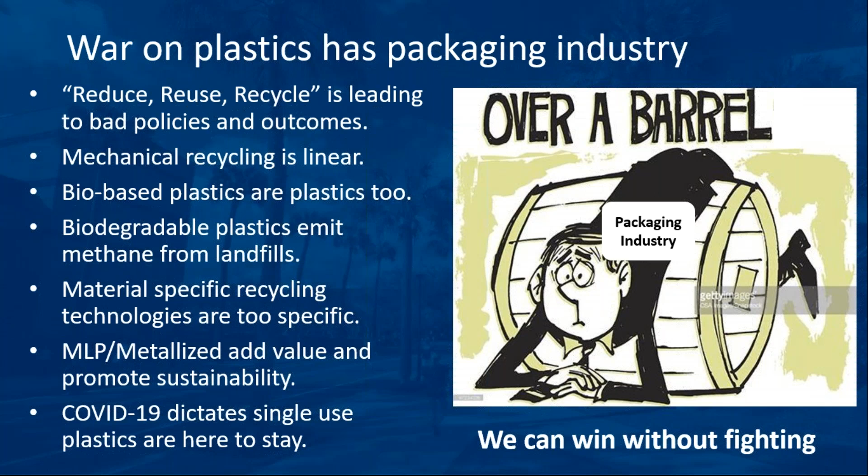Okay, we have a problem, right? I just went into Bing and searched ocean plastic, and you get these kinds of images. Some of them are doctored, of course, some not. And we are all very sensitive to plastic in the environment. Plastic gets a particularly bad rap, I think, because it floats, whereas a beer can and bottle sink. So we see it, and just by the fact that it floats, it also can interact with nature, and nobody likes to see that.

I'm not trying to justify any of this. I'm saying that we have to figure out how to solve it. But the problem itself is not plastic. We can't solve this problem by eliminating plastic, because we're not going to do that. That's a crazy notion. What I would say is that the plastic is not the problem, it is the way we're handling waste. And for that, we have to help municipalities make the right decisions for us, because ultimately they do have the responsibility for handling waste. That's not something we can put onto the producers.

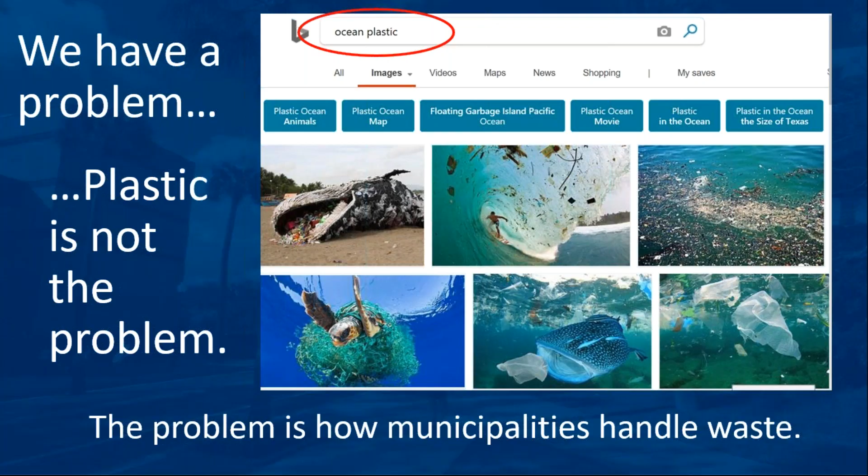Okay, I kind of went through this. So reduce, reuse, recycle, ultimately these things are linear. So I'm just going to go through that. Maybe just next slide.

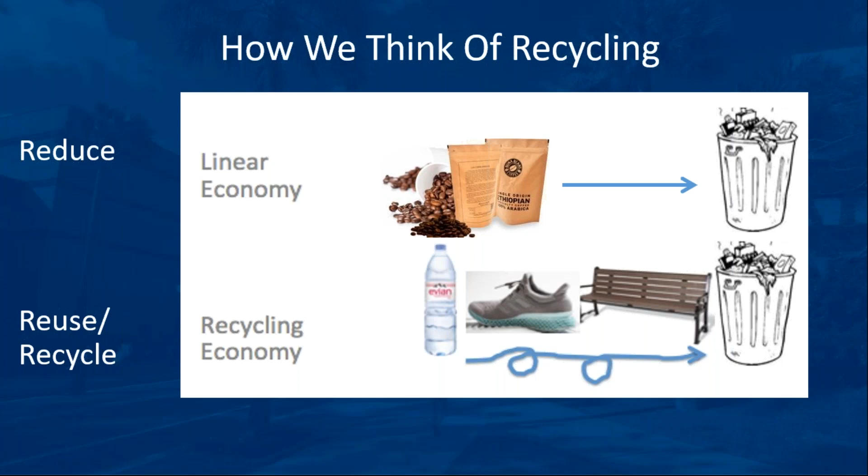Okay, here's just to reinforce the notion. A colleague of mine up in Toronto, Canada—Toronto's very forward-leaning in sustainability—they've been trying to do a lot of these things. So we could almost look towards places like Toronto as a cauldron of experimentation for a lot of bad ideas that they've already tried. So Calvin studies this and does great reporting on it.

But here was a quote I particularly appreciated. He says, when evaluated—and this was done for Glad products, bags, light plastic bags—when evaluated over the entire life cycle of a product, package lightweighting will often result in superior environmental and economic outcomes, even in instances where those materials cannot be readily recycled and are subsequently landfilled. This is particularly true of lightweight packaging used for food storage.

It's interesting that he brought up food storage, because the greatest sin is when packaging fails and we lose the food, because there's a lot of environmental footprint that goes into the food—a lot more than the packaging. So it is the greatest sin to lose the food when, if we are going to cheap out, or misdesign the packaging for some benefit, and then we end up losing food.

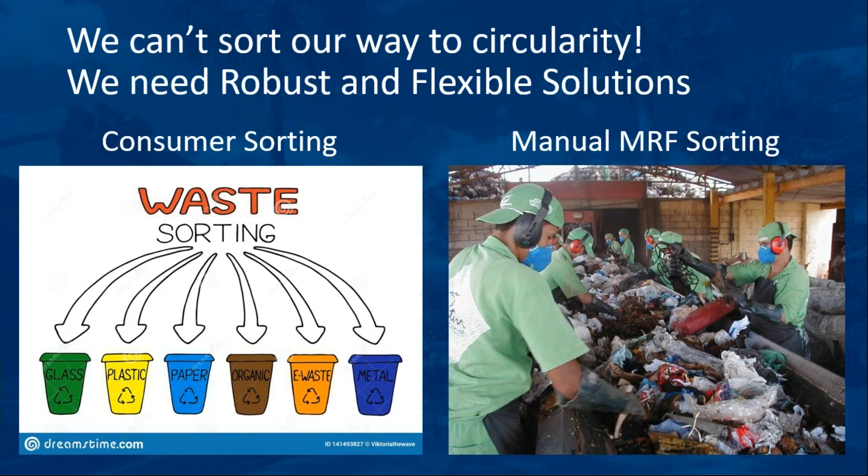So what we're really doing, if you talk to industry folks, is there are certain materials in there that they want—they want the clear, clean, no-color material. So they want the clear, clean bottles, and of those, usually just PET and high density polyethylene. That's all they really want, and it's all they really make any money on. So as we improve our sorting, what we're really doing is purifying those very narrow streams of materials. There's plenty of PET in the sour cream pack I mentioned, the squeezable thing—there's PET and all kinds of other stuff, but it's very difficult to get at. So the easy stuff that's clear and clean is what they want.

And what we're really doing by improving sorting is actually creating more waste that ends up in a landfill. So even though folks like, possibly my mother, who likes to recycle everything or thinks that somebody's going to figure it out—she'll put it in the bin and say, well, somebody should figure out how to deal with that—the reality is that most of that stuff just gets diverted right into a landfill. We're just separating the wheat from the chaff; we're not really making good use of that stuff. So the dirty stuff, things with labels adhered on them, small things like a Keurig K-cup, multi-layered materials—that stuff is not getting recycled.

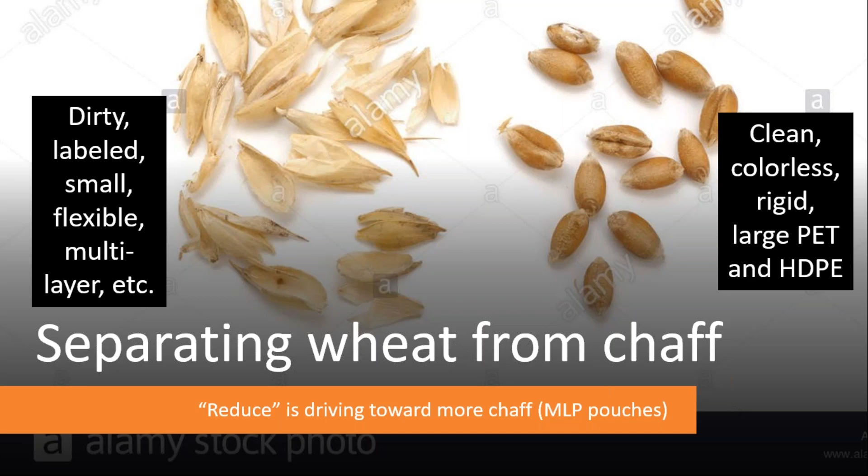Next slide. All right, on top of that, we've committed to sending these heavy trucks that get about 3 miles per gallon to pick up what we call recyclables, which over time has diminished in weight—a beer bottle or beer can, for instance, has lost a lot of its weight. So the economics of sending these duplicate trucks around to collect recyclables is killing the economics of recycling. So on top of the environmental impacts, it's a very challenging thing to do.

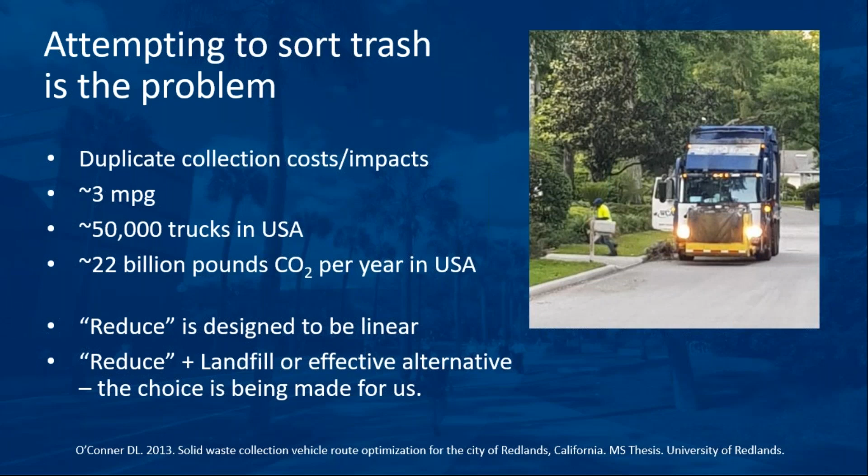All right, so next slide—let's get into the solution here.

So this is kind of a summary of what we think we're doing, or actually what we are doing. We're taking our municipal solid waste, we think we're sorting it perfectly, we think we have all these great technologies making use of it, and of the stuff we actually do make, we're making things of lesser quality. That's basically what it is.

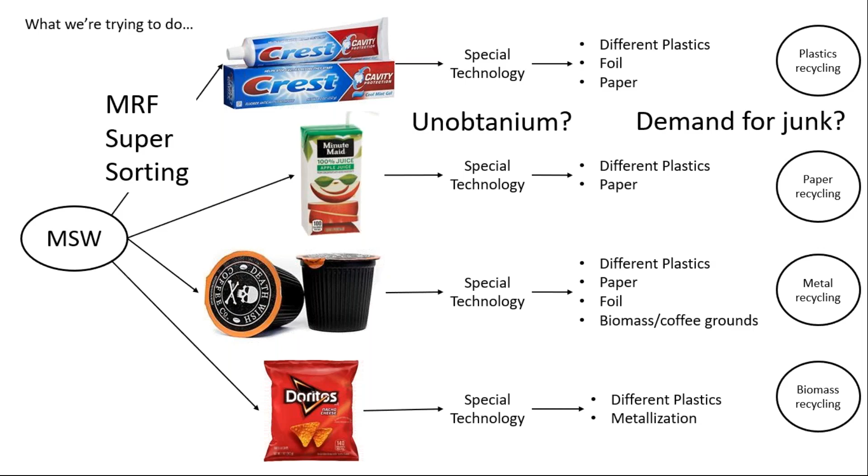What we should be doing is real circular economy, looking to our waste as a material resource, and we have the technology to do that. Syngas, which I mentioned in the beginning, is the key to circular economy sustainability. We have the technology that is robust and flexible.

It's kind of like an economic equation. It's robust in the sense that it can accept everything in the municipal solid waste. That doesn't mean we'd want to put everything in it, but it can take everything if we had to. This doesn't mean we can't continue mechanical recycling for markets that are economically sustainable, but everything else can go into this system.

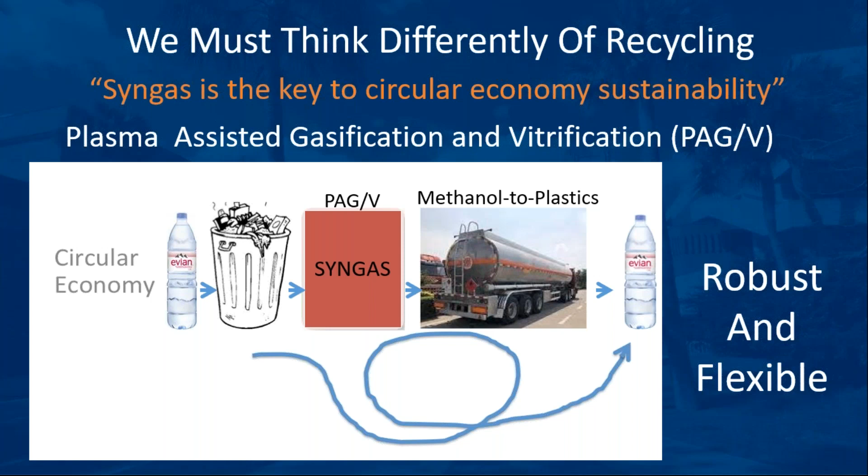And from syngas, we can make plastics again. In fact, that's what the Chinese are doing, I'll show you that in a minute. So next slide, what this looks like.

What comes out of it is the syngas. Synthesis gas is a mixture primarily of carbon monoxide and hydrogen. What you should see is carbon, hydrogen, and oxygen, which are the basic building blocks of pretty much everything we make. So the magic of this technology is that we've put it on top of what we call plasma-assisted gasification.

In that, we've borrowed equipment that already exists in the metal industry—electric arc furnaces, plasma torches, things like that. Essentially this is a lava machine, and in there is molten glass and metal.

Ultimately, the material is shredded and goes in here. So if we had an MRE, for instance, the metal foil incorporated in there would be melted down and recovered out the bottom. The rest of the stuff, the polymer-coated material, would be converted into syngas, which would be recovered.

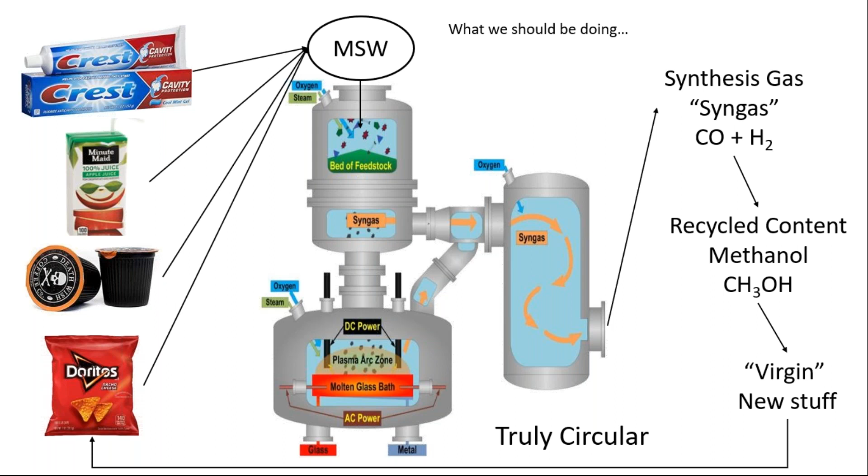This is not new. Eastman Chemical has been gasifying coal for many years in Tennessee. They've actually converted a coal gasifier to run on MRF bundled waste plastic. So this is totally doable—they're doing it today, on purpose, to make syngas, and from the syngas they make all kinds of great stuff.

Eastman is a forward-thinking company in this regard in the United States, but their technology is more traditional gasification, so it requires a high degree of sorting—only certain types of polymers—because it doesn't run hot enough to be as robust as plasma-assisted gasification. But at the end of the day, with the right feedstock, they can get syngas and be very circular. They call that carbon renewal technology.

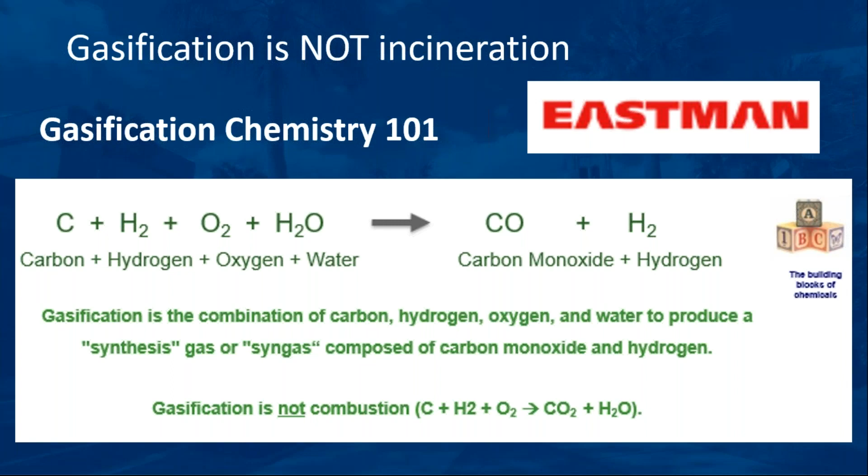They provided this slide, which is really their argument to try to convince people that gasification is not combustion. So we'll accept that, we'll stipulate that gasification is not combustion.

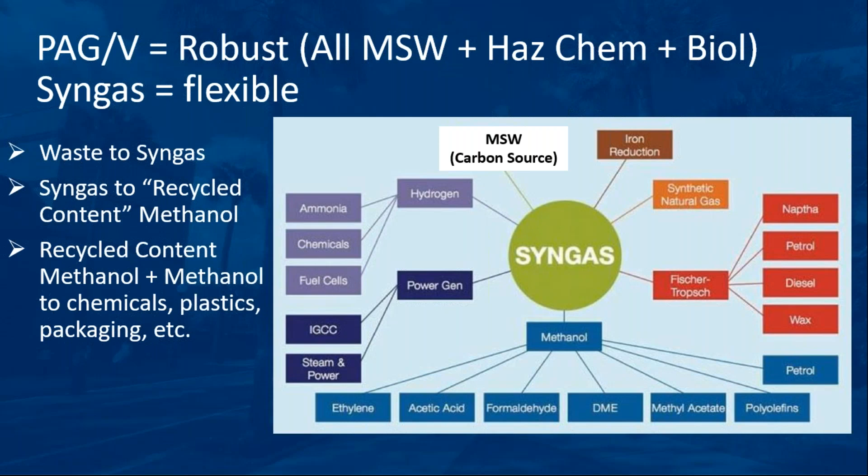So again, how is this created? We're talking about, in a robust way, taking virtually unsorted waste—we don't have to sort it to the extent we're trying to now. So we alleviate the sorting problem, which is a big problem.

We make this syngas, we make methanol, and now methanol is not only a very flexible, versatile material, but it's also fungible, which is kind of a deeper concept here. Basically, Eastman Chemical says, we'll take as much methanol as you produce. They want it—they want offtake contracts for things like this.

Now, the thing is, we might not need to even ship it to them. We can produce it, and then through an exchange, almost like a carbon credit type of thing, they might take some traditional commodity methanol off the market at their location, and we would put ours back into that pool. We'd save the environmental impact of actually shipping that methanol from Florida to Tennessee. So I think there's tremendous opportunity for distributed manufacturing and great paying jobs in a sustainable environment.

But from methanol, we make everything—this just shows that we make plastics, fuels, construction materials, paints. The idea here is there's an economic sustainability argument, in that methanol will serve so many markets. It's not like today when you have a Capri Sun bag and TerraCycle sews it into a reusable shopping bag that you get five uses out of. This is something that can be used in so many different markets thirsting for sustainability, so there's a clear benefit to that.

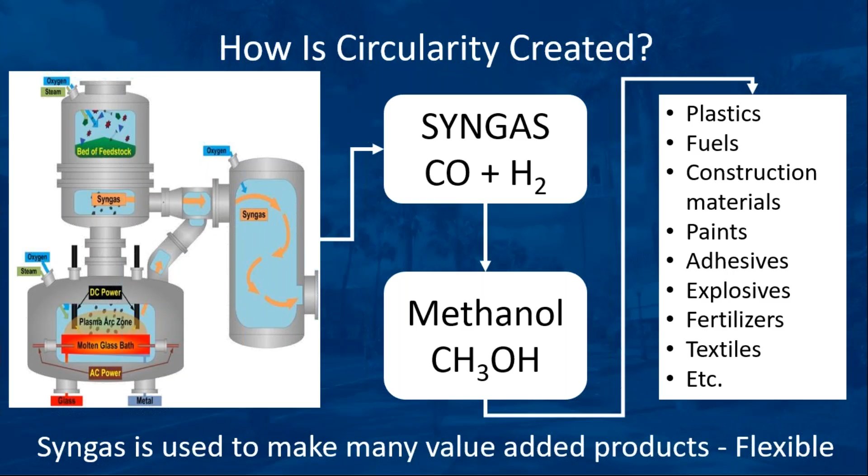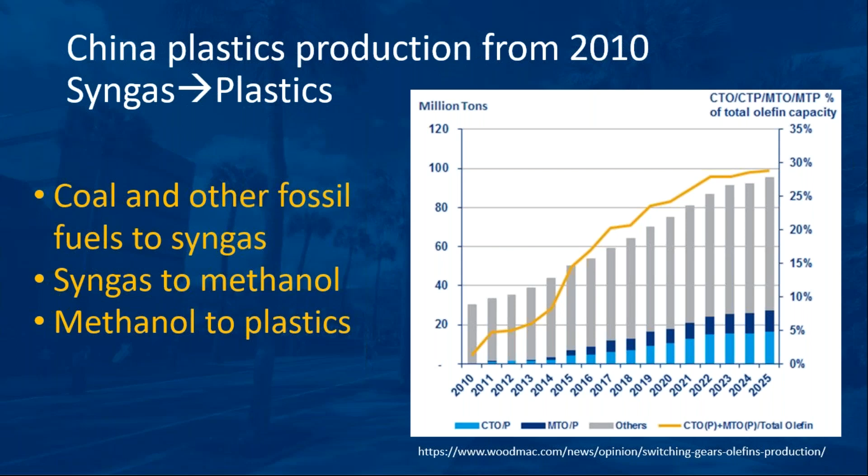So in any case, the bullets here: coal and other fossil fuels are used to make syngas. That's how they're doing it in China mainly. The syngas is then converted into methanol, and the methanol can then be remade into plastics. And when we do that from waste, we achieve a circular economy. Next slide.

So in fact, one of the things we're working on here at University of Florida is the technology to convert syngas into methanol. There's a lot of great opportunities there, technological ones. This is all about catalysis and things like that. But there's a lot of process development that could go on in converting syngas into methanol. From there, methanol to plastics is already established. Next slide.

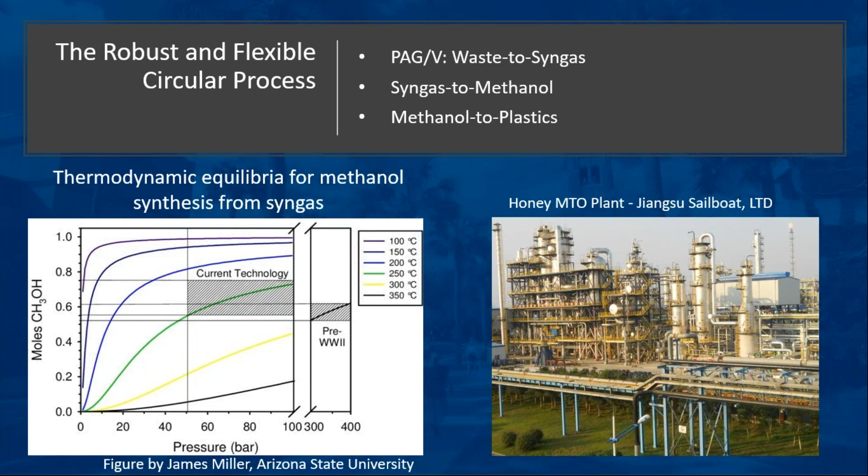All right, then what comes out the bottom, right? So I mentioned that the incidental glass and metal that's in there is also processed. We wouldn't necessarily want to be putting glass into it simply to melt it down and solidify it again, so there's other things we might want to do with the glass. To the extent that we have easy to get at steel and aluminum, we would want to separate those out because those have already existing healthy recycling markets.

But the rest of it, the foil in the MRE package, the closure on your Campbell's soup can that goes into the microwave oven that has the metal embedded on it and the number 7 plastic, that metal would basically be harvested out the bottom of this reactor. Essentially, we'd end up with mixed metal ingots and a mineral oxide rock or other products. One company makes a glassy insulation product that has a high value. But at the end of the day, these are environmentally inert materials that can be used in construction. The rock would be used as aggregate in construction or abrasives. There's a number of applications that can be done with that.

With the metals, another interesting thing that in fact is a national security issue is China's monopoly on rare earth minerals. What we could actually do with this is be processing our electronics waste, and this metal ingot that comes out would kind of be an ore for rare earth minerals that could then be processed. So from a national security supply chain type of thing, we should be recovering that. Right now, we're just burying it in landfills. So another opportunity there. Next slide.

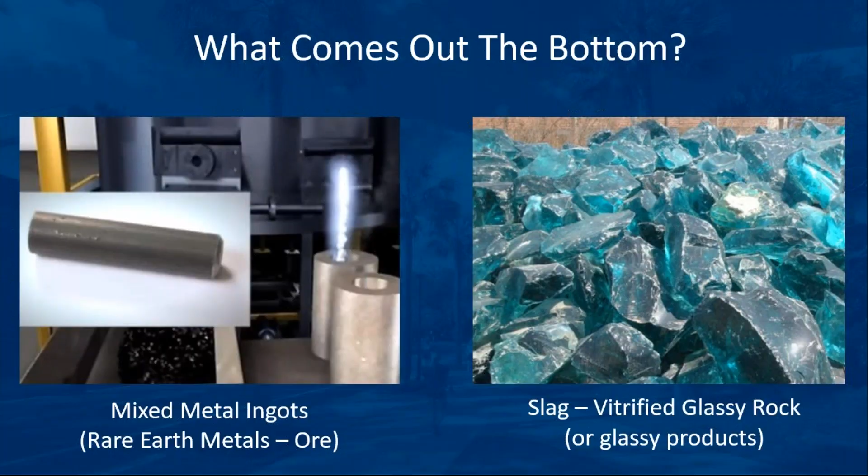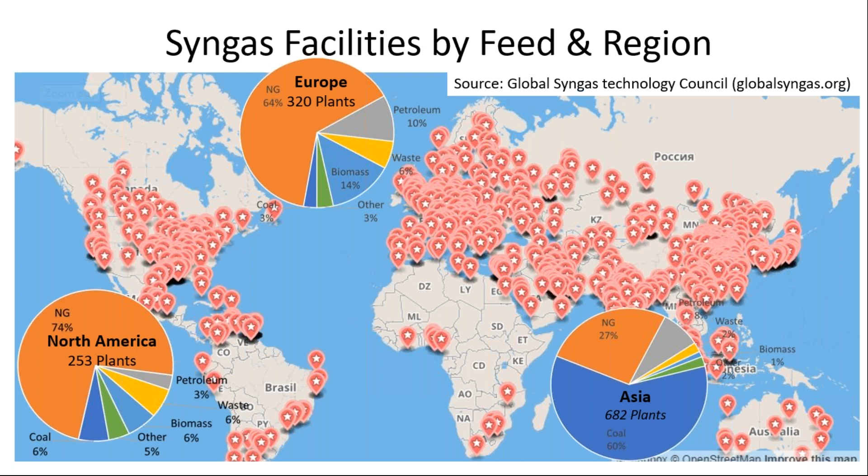This, again, from Global Syngas Technology Council. This is today's gasifiers globally. We make syngas on purpose all over the world because it's a useful, versatile chemical feedstock. This kind of gives you a sense of it. You could go to their website and pull up the map as well and dig in, clicking on each one to see what its feedstock is. You see that in Asia, coal is the primary feedstock, whereas in Europe and North America we use a lot of natural gas. We would like to see a lot more of our waste being used to make syngas. Next slide.

All right, so what's in our municipal solid waste? This is the wheel that comes from the EPA. Basically, if you work your way around there and add it up, what you'll find is that about 85% of that wheel is carbon-containing stuff that can be used to make syngas. The rest of it, the metals and glass, aren't necessarily valuable to this process, but they don't hurt it—they get melted down and recovered. So that's that. Next slide.

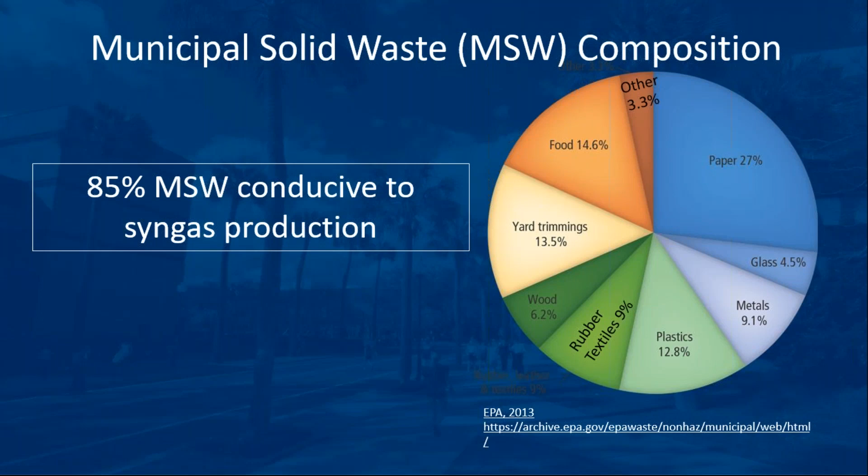Okay, the next gold rush is recycled content. All of these big brand owners want it, they need it, and they don't know where they're going to get it. We think that recycled content methanol is going to be the market for that.

And not only that, this is recycled content without compromise. This is not a bottle that's been ground down, kind of beaten up ten times and re-extruded into lousy material. Every time you make it, it's chemically new. I talked about the fungibility of the methanol, which would allow us to get additional benefits since it's a standardized output.

And there might be some comments about pyrolysis, right? So what about pyrolysis? Pyrolysis is wonderful, but it's kind of like a cousin to gasification. The problem with pyrolysis, though, is that it's the process that's ideal for making char, like charcoal—that's what we historically use pyrolysis for. But pyrolysis makes two other things; it has a solid, liquid, and gaseous output.

When we use pyrolysis for recycling, people are after what they call pyrolysis oil, essentially the chemical stew, liquid stew that comes out. But that stew is dependent on what you're putting in. So if we have pyrolysis instead of gasification, we end up with lots of different stews, which makes it much more difficult to exploit commercially because there's no one process that can just deal with the stew.

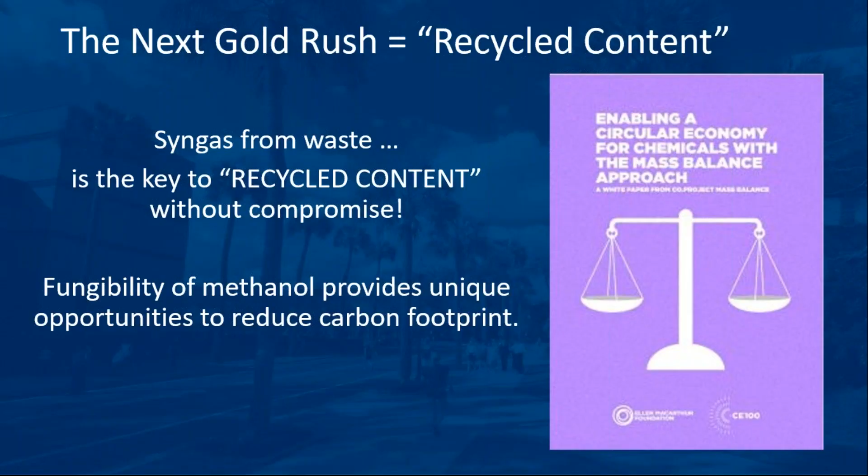Okay, so this is about getting it all. This image comes from a Florida company called Plasma Power. They were interested in making electricity, which frankly isn't necessarily a great economic equation, especially when fuel prices are low. But this image is on the inside of the vessel—this is essentially what the lava machine looks like. This is a very hot, robust process.

So we can handle things we today discard or don't recycle—dirty, contaminated plastics. That's not a problem here. In fact, we use this process to degrade chemical weapons and similar things, so it could even be used for organic chemical hazardous waste or biological waste from hospitals. It adds onto the municipal solid waste in our communities that we can process locally and produce good outputs. Mixed plastics of all types, metallized stuff, laminates, foils, labels, adhesives, shrink labels, fitments—all of that goes in, not a problem.

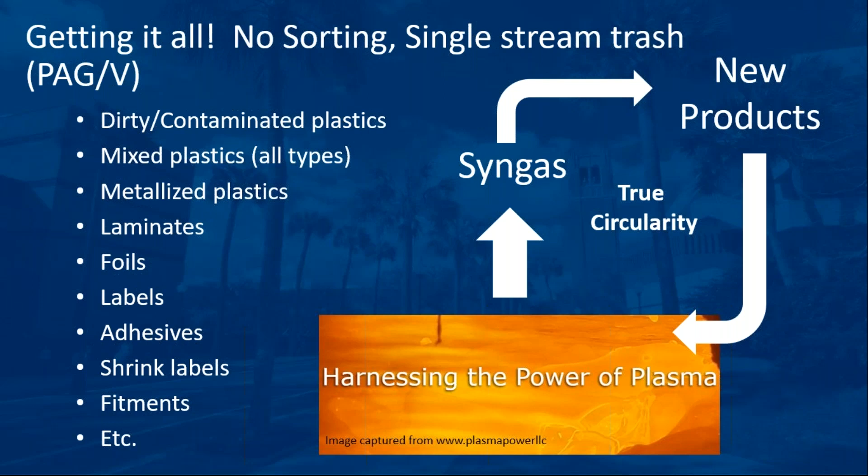So what to do? What do I think we should do? Well, I think we should push to simplify our waste handling—let's stop sending duplicate trucks down the streets, wasting fuel and causing carbon emissions. As a society, I think we'd be better served by a campaign that made it socially unacceptable to litter, kind of like don't smoke, don't do drugs. If we just focus on not littering, I think we could have an impact on the amount of environmental litter out there.

I think we should push brands to make a market for recycled content. Instead of Walmart saying we want the recycled content but we're not going to pay more for it, they should commit to paying more for it, and that would help create the market for this material. Now, what's happening today instead is that different regions are imposing what they call extended producer responsibility taxes and fees—EPR fees—and companies are jumping on the bandwagon saying we'll just pay.

So they're okay with paying a tax that sends money to money heaven, as opposed to—and I think this has to do with who's making the decision at the company. You have a chief sustainability officer at the top saying we're going to pay the tax because we're a good corporate citizen, and then you have the buyer who doesn't have the authority to say we're going to pay more for the recycled content. Internally, these companies need better communication to solve that.

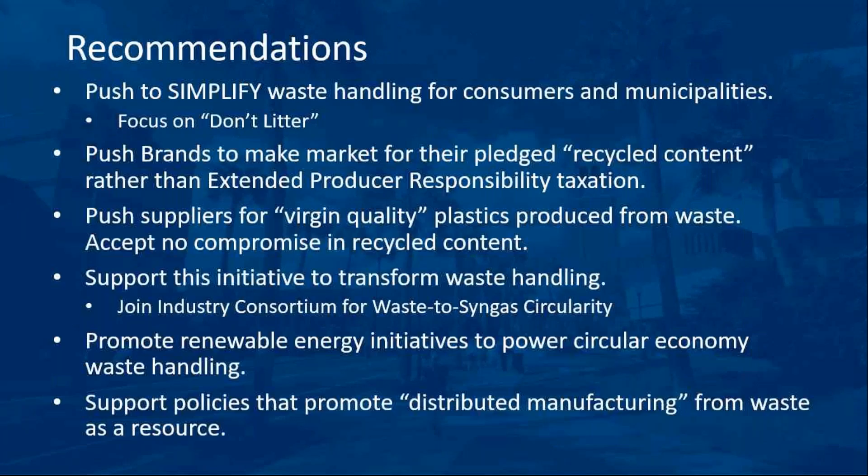I think this is the last one. Oh no, one more. This is kind of a summary of circular—sorry, go back to that one. So, paths to circular economy sustainability. There's kind of two loops here.

The first one is the bio-based path. There's a big initiative to make plastics from sugar cane. There's a company in Brazil, Braskem, making plastic from plants, which is wonderful. But still, it's polyethylene at the end of the day. So what do we do with it?

In either case, if we do have more bio-based materials, that stuff is essentially biomass, and we can make fuel out of it, fuel and power, and that is circular and that's kosher. So the more of that opens up that avenue for circular economy. But today, a lot of the stuff in the waste might come from fossil fuel. Then the methanol—back to syngas, to methanol, back to the material again—offers us another route to circular economy.

But both of these are powered through the syngas pathway, so syngas is the key to circular economy sustainability. And now the final slide.

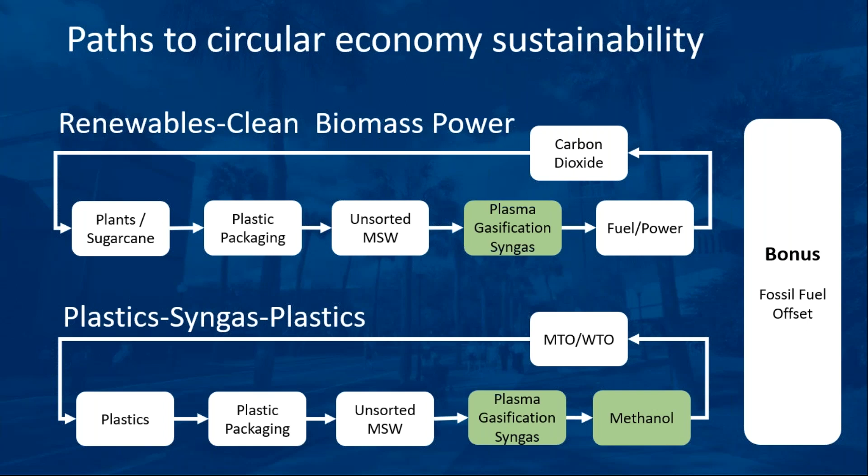Okay, so basically promoting this consortium. We have a number of companies interested in this type of thing. To the extent that we could get industry, academia, and government involved, we have the opportunity to do that. So I thank you for your attention, and happy to take some questions.